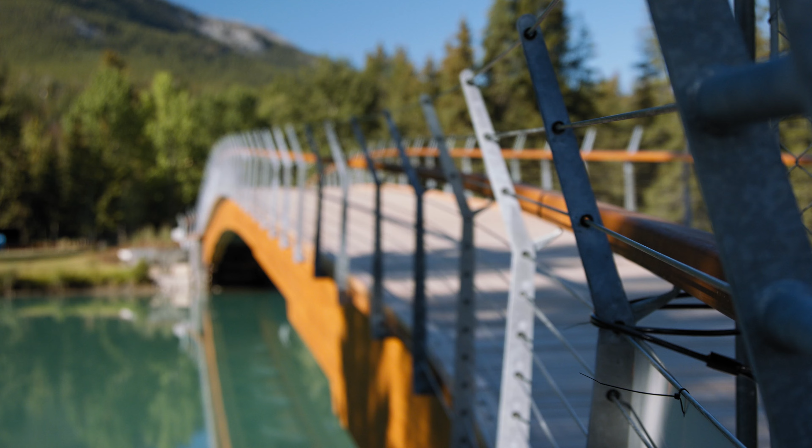This bridge is a fabulous new community connector. This really does extend our Central Park area. It extends our parkland because now we have a connection between Central Park and our beautiful rec grounds. It's a way to enjoy Banff and get around Banff without being in your vehicle.

The history of the Nancy Pauw Bridge coming to the town of Banff is really 108 years in the making, dating back to 1914 and the City Beautiful Plan for Banff, which was created by the British town planner Thomas Mawson. And Mawson envisioned a network of bridges crossing the Bow River so that people could move around and enjoy this place of spectacular beauty. And so this is really the fulfillment of a 108-year vision for the town.

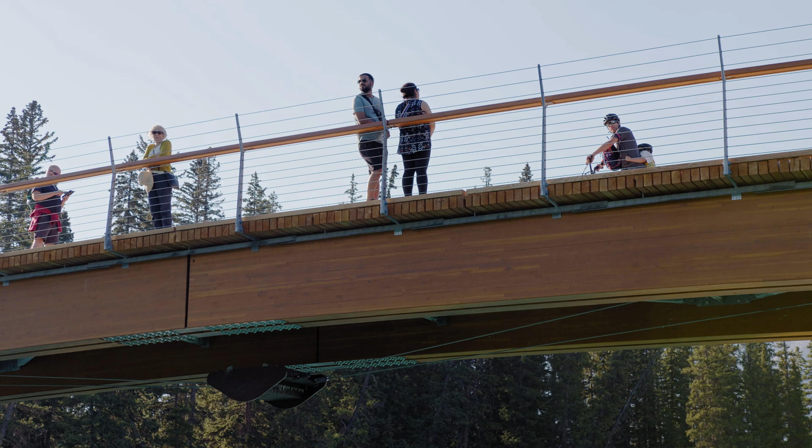From a Pauw Foundation perspective, we're very proud of this initiative because it's a perfect legacy to Nancy Pauw. Nancy was someone who was extremely active and led a healthy lifestyle. She did triathlons, Ironmans, hiked, and was an avid cyclist. So seeing a pedestrian bridge in her name is the perfect tribute.

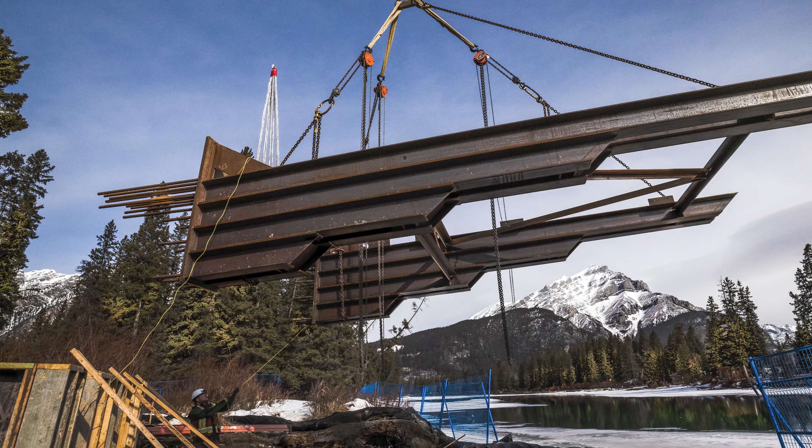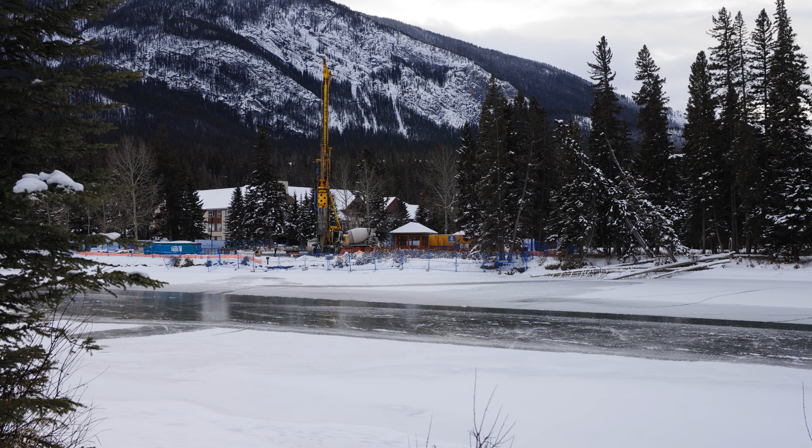One of the wonderful things about our approach that I've so much enjoyed, as I think of myself as an engineer builder, is the fact that I'm responsible for the construction. We do all the design work, conceptual design. We hire different consulting engineers to help us, for example, geotechnical engineers to help with the foundations. We go through a design phase and then go straight into development of 3D models and all the engineering, and then getting into construction. We are the design builder of the projects.

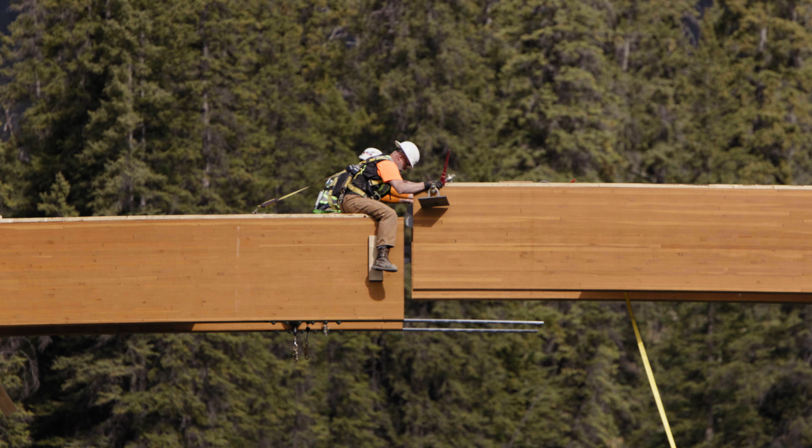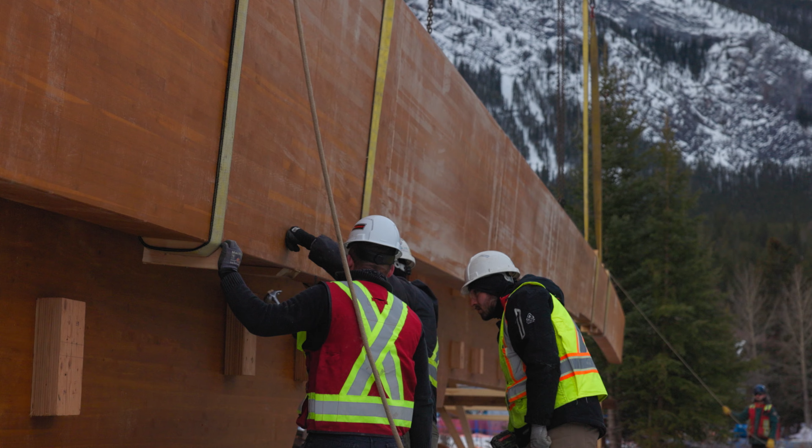We get involved with the client early on. We come up with a proposal, submit to the town of Banff, and there's a lot of planning, engineering, design development, from procurement to scheduling to executing the project on site. The new bridge in Banff is our third bridge for this client. It's a bridge actually that the town has been waiting to build for 100 years.

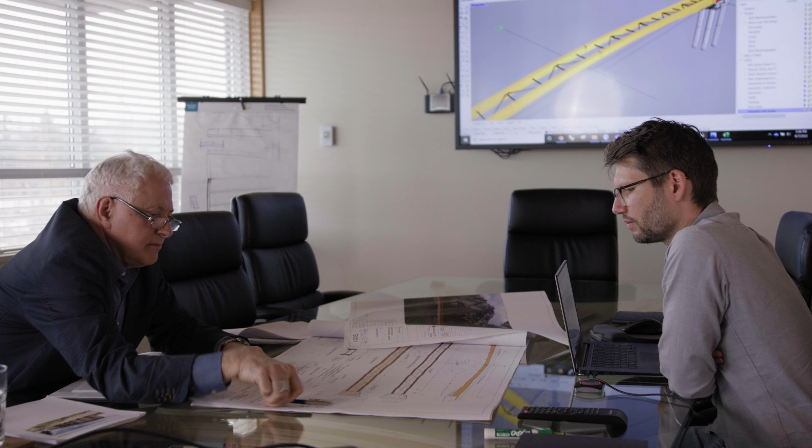So in a design build partner, the town was really looking for someone who shared the town's vision for a structure which could blend seamlessly into the environment. We wanted someone with a technical ability to build a structure that was incredibly challenging and yet with the modesty to allow it to be subservient to the natural environment.

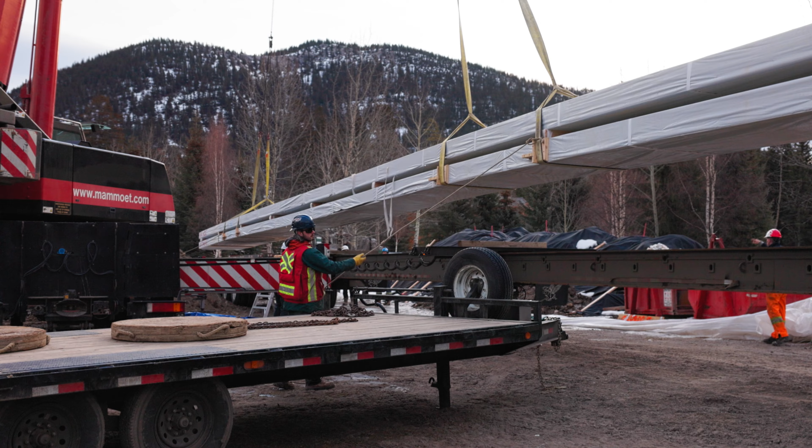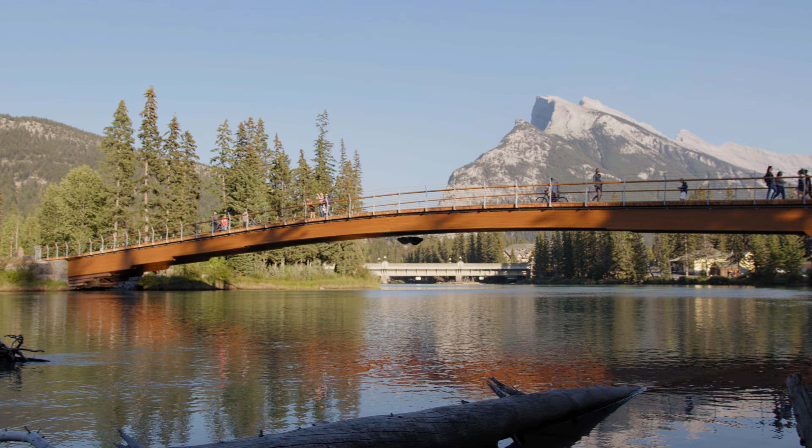To deal with logistics, we had to do a lot of things in advance. Each section of the bridge is 40 meters long that we had to transport on the highways and into the town of Banff. What makes this bridge really unique is that it's actually a shallow arch. When you design a shallow arch, the engineering has to be up a notch to deal with the design of the loads transferring through a shallow arch.

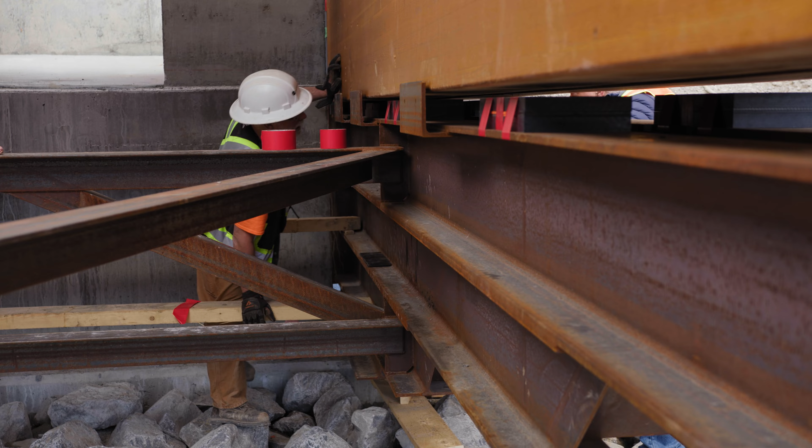As you can imagine, an arch that's like this, it creates certain thrust at the abutments, but when it gets down to this, it creates tremendous forces. And so we are designing the bridge so that under a design load, that abutment only moves half an inch. In order to do it in two pieces, we had to deal with connection challenges and figure out how to connect two pieces in the air.

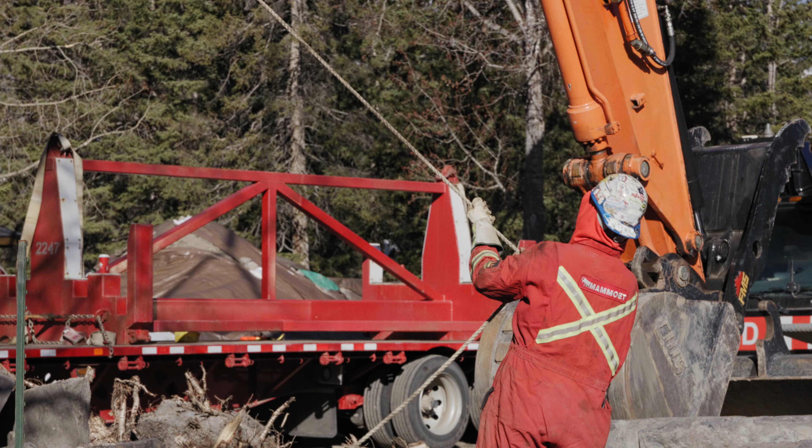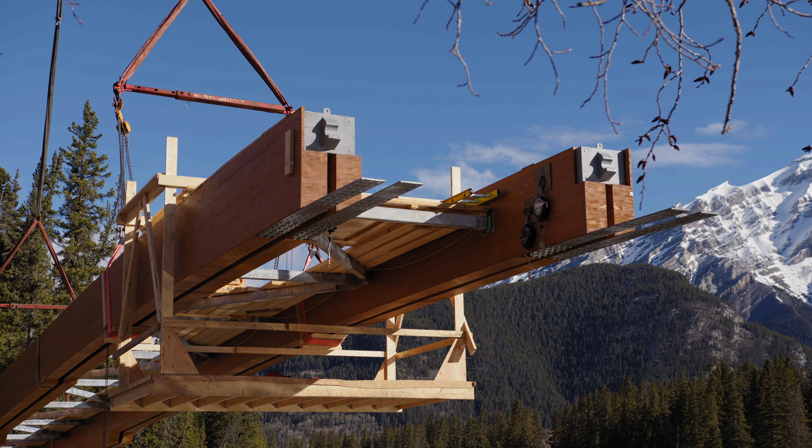If you can imagine taking two pieces, each 40 meters or 130 feet long, and bringing them together so that they touch perfectly in the middle. The dimensional tolerances are exceedingly fine. Those bearing connections are like a 5-inch diameter pin that nestles into a knuckle, and the backing plate behind it is 4 inches thick. It's there to distribute the stresses into the timber behind it, and those two knuckles are going to come together just like that and thrust into the abutments.

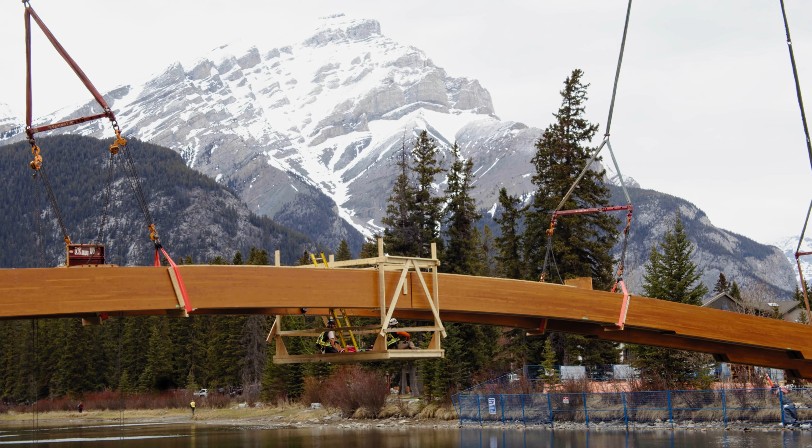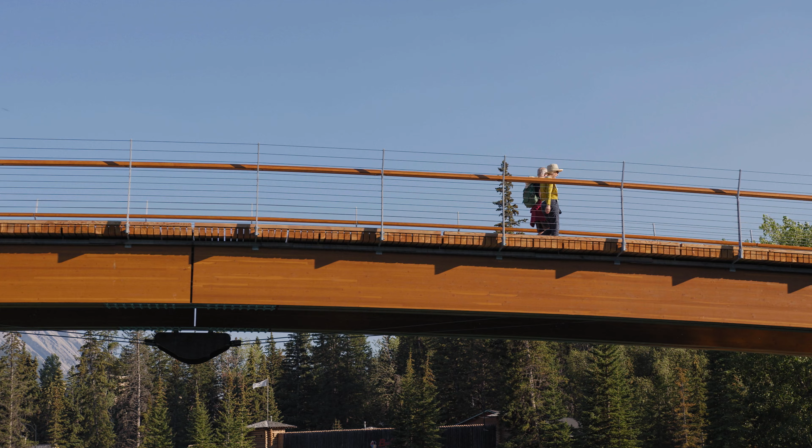The thing I love about footbridges is that they're like pure structure. They don't have to carry heavy loads. They just got to get people across. What you don't want is people crossing the bridge to feel uncomfortable. The bridge has multiple natural frequencies.

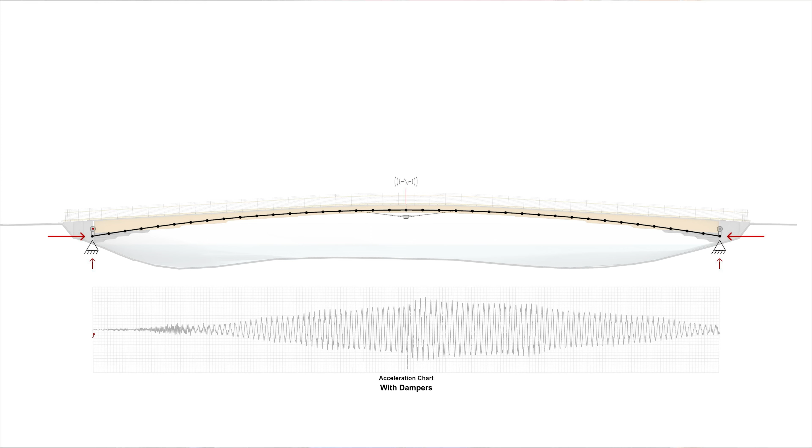And if one of those modes of vibration coincides with the frequency of walking or with jogging, you could potentially have a problem if, we call it, the accelerations become too high. And so we did a huge amount of analysis and ended up putting in tuned mass dampers in order to cancel walking frequency and to cancel jogging frequency.

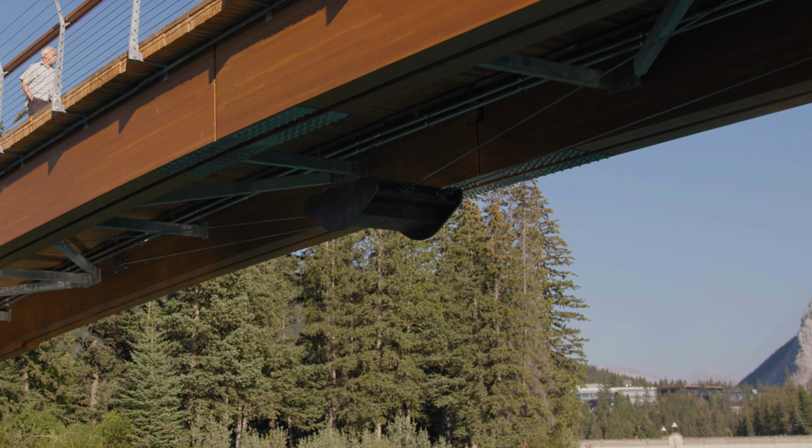Well, in particular, our part really was about trying to knit the bridge into the landscape. This was a pretty wide open area. Originally, we had to take down a bunch of trees too, which we knew would impact the view corridors. And we knew there was a significant amount of regrading relative to the flood elevation that we had to maintain for the bridge and the overall height.

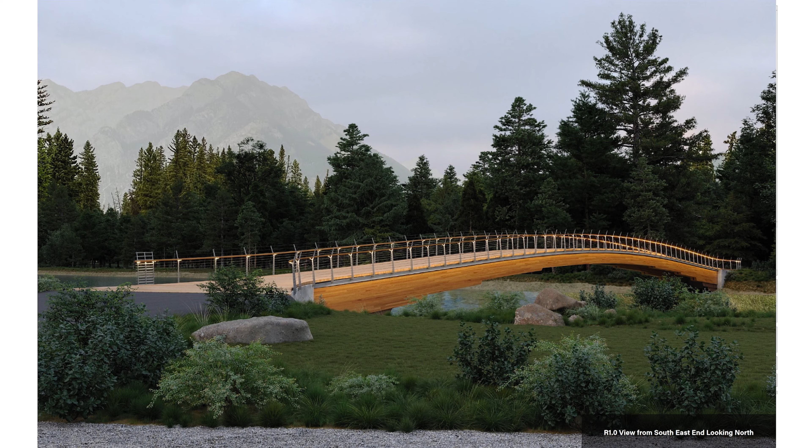So that was really the primary thing, is how do we fit it in and make it look like it's always been here and not sticking out. So it's that integration. And then materiality was really big too, really leveraging the natural landscape. So the stone and wood that you see behind you here today, that was really primarily what we're trying to do.

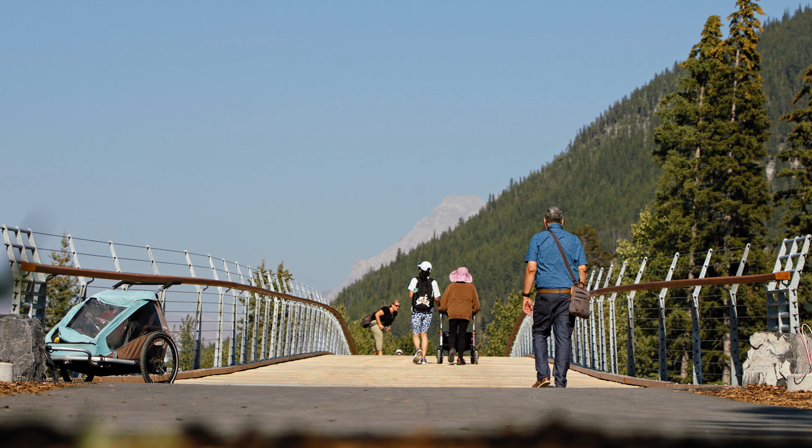It's fantastic when you see an infrastructure project come together and it looks exactly like the renderings you were provided. And that certainty is so reassuring from a regulator's perspective and a designer's perspective. And so we're very grateful about the forethought that went into the bridge from StructureCraft's side. It feels like that bridge has always been there.

From the second we cut the ribbon until, whatever it is, a couple hours now, I don't think there hasn't been anybody on it. It ticks so many boxes. It's community, it's active lifestyles, it's helping with climate change. It's truly a win-win-win, and we are so happy to have it open. It's a bridge that will be enjoyed by residents and visitors alike. Anyone just getting out to enjoy Banff's beauty, it will benefit everyone, and that's really the great thing about it.